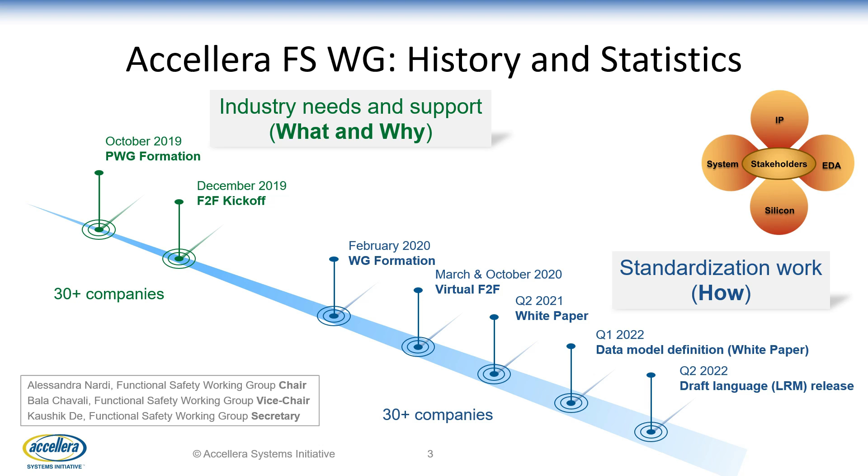Just a quick reminder before we jump into the meat of the workshop: please keep in mind that everything you see in this presentation is work in progress. It's the standardization working group, so as you can imagine, there are tons of discussions ongoing, and until something is published, things can change. Keep that in mind, and please enjoy the rest of the presentation.

With the increasing demand of compute power, the electronic systems deployed in safety critical applications become more and more complex. As a result, the safety requirements also become more complex, and it affects all parts of the system, including hardware and software. Addressing these safety requirements results in various safety activities and operations. These are documented in ISO standard and are referred to as work products.

However, the standard does not strictly specify how this safety data is stored, exchanged, and integrated among different entities. Additionally, the format and language of this work product is also not standardized. This poses many challenges to the creation, manipulation, and exchange of data. The Accellera working group has identified 5 major categories of these challenges.

These include exchange of the same safety information across different automation tools, connection of safety data with design information, sharing of safety data across different operations and work products in the same layer, and also across multiple layers between suppliers and integrators. The last one is traceability of information across the distributed development environment. These challenges are described in more detail in the next slide.

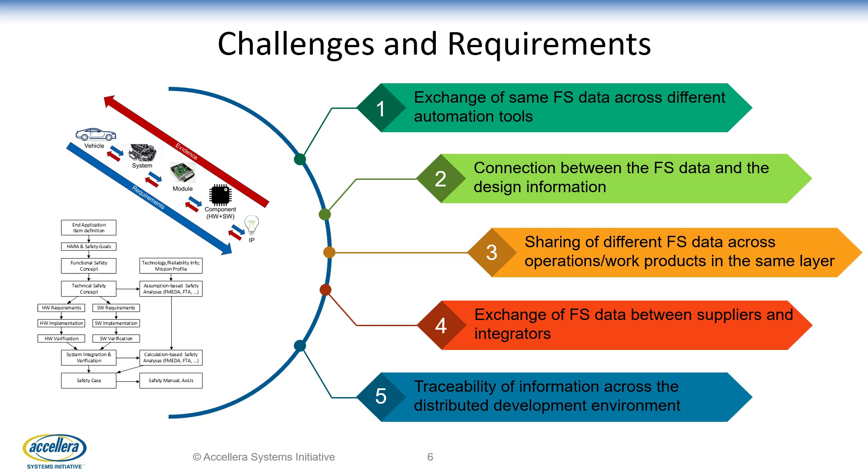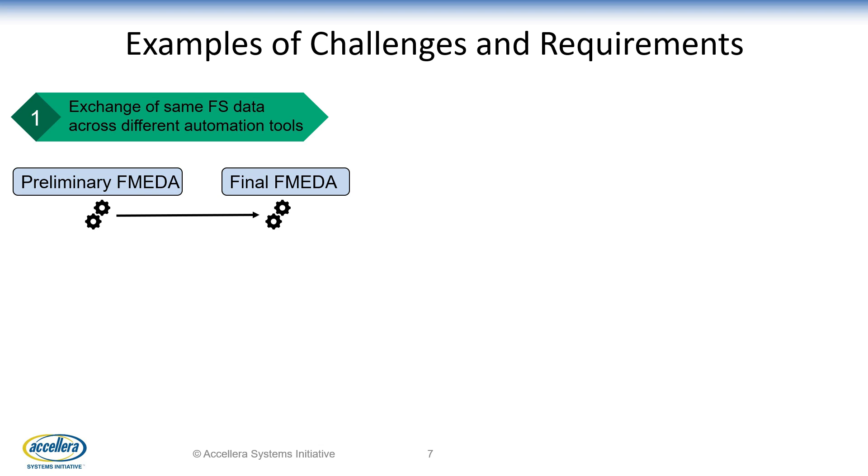In the last few years, there has been a lot of activity in development of automation tools for functional safety. However, these automation tools are developed in parallel, and they don't support a common language or format. For example, an FMEDA created by a supplier using one tool cannot be directly used by the integrator using another tool. Another example is when a preliminary FMEDA needs to be leveraged into a final FMEDA.

The second challenge is the connection between the functional safety data and design information. When doing safety analysis, some information that is needed comes from the design metrics. For example, when performing final FMEDA and calculating failure rates for a failure mode, design information such as the area of the design, transistor count, or design hierarchy is needed. This is currently a manual process, or a custom solution is developed.

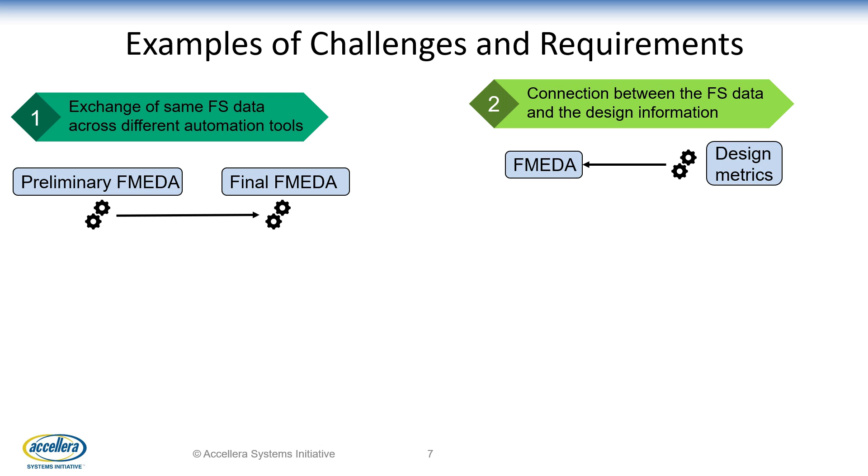The third challenge is sharing functional safety data across different work products in the same layer. There might be several different safety related activities or operations performed within the same layer, and these different operations require data that is dependent on each other.

For example, when FMEDA is performed, the safety mechanisms and the failure mode information is contained in the FMEDA report. This information now needs to flow to the design, implementation, and verification plan. Also, the verification metrics need to be back annotated to the FMEDA report.

The fourth challenge is the exchange of functional safety data between different suppliers and integrators. For example, one integrator might be getting FMEDA reports from two different suppliers, and these two FMEDA reports might be in completely different formats. So now the challenge is on the integrator side to merge these two FMEDA reports and create a system level FMEDA report. A second example is when one particular supplier needs to provide FMEDA to two different integrators.

In this case, the requirement might be different from the two different integrators. As a result, the supplier will need to create two different FMEDA reports for the same design in order to satisfy the integrator's requirements. The last challenge is traceability.

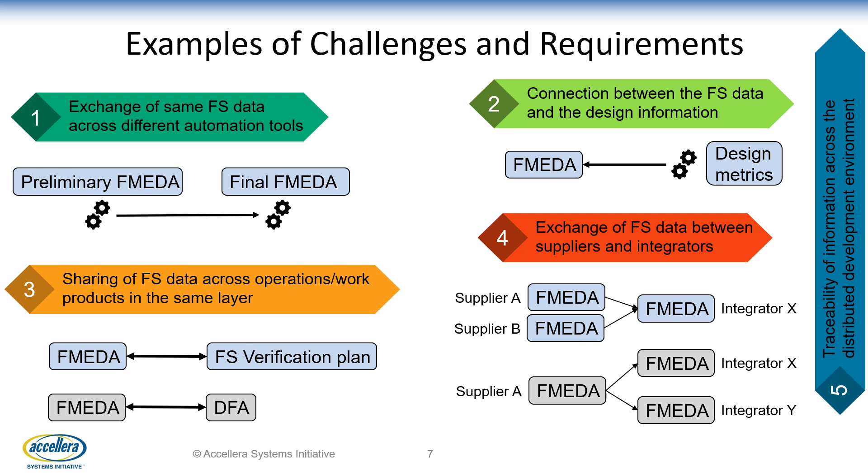The challenges outlined earlier require improvement in three different characteristics of the development process. First is interoperability, which means the ability to accurately provide and integrate data across the supply chain. Second is traceability, which is the ability to bidirectionally trace and verify the history and connection of the information. And the last one is automation, which is the use of EDA tools to automate tasks of manipulating, storing, and exchanging information.

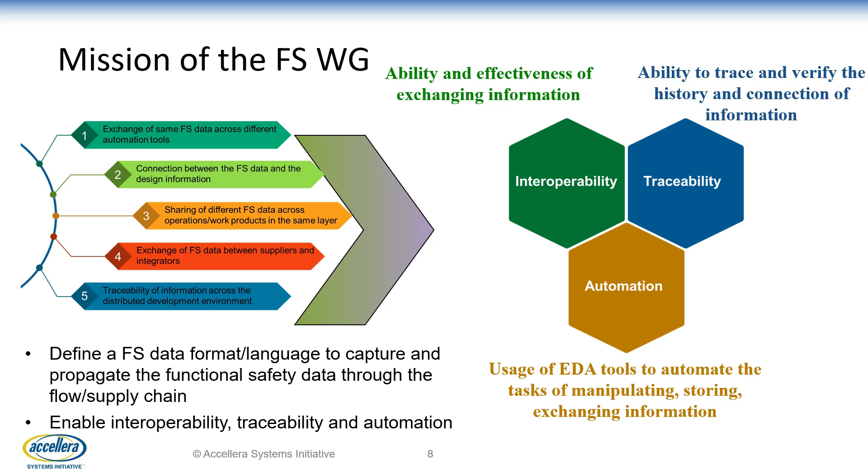The immediate mission of the Accellera working group is to provide a unified definition of functional safety data, format, and language to propagate data across the distributed development environment. Eventually, this enables the interoperability, traceability, and automation of data. To support safety critical applications, information needs to be passed or exchanged along two different directions.

Interlayer is the communication between, say, IP to a component, or a component to a module. For example, safety requirements might flow from the upper layer to the lower layer. On the other hand, multiple safety activities might need to be performed in the same layer. For example, safety requirements might flow from the safety documentation to the design and to the verification in the same layer.

As the safety life cycle proceeds, work products such as safety requirements, FMEDA reports, DFA reports, and FTA reports might be generated. It is therefore valuable to establish standard definitions of the data elements contained within these work products.

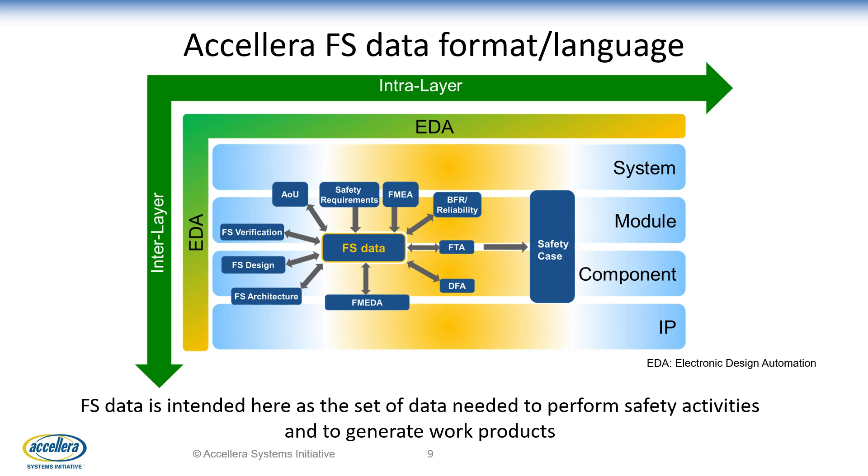Several standards exist today for the functional safety development lifecycle. While IEC 61508 is applicable to several industries, there are also industry-specific standards derived from 61508. For example, ISO 26262 is specific to the automotive industry. These standards provide best practices and guidelines that need to be followed in order to achieve adequate risk reduction.

The Accellera working group does not intend to define new practices. However, the focus is on developing the functional safety data format and language that supports these guidelines. This data format and language will be consistent with existing standards, and focus will be on their enablement by improving automation, interoperability, and traceability.

IEEE has also formed the P2851 working group, which is complementary to the work being performed by Accellera. As in other successful standard definitions, once completed and published, the Accellera standard will be considered for contribution to the IEEE standard.

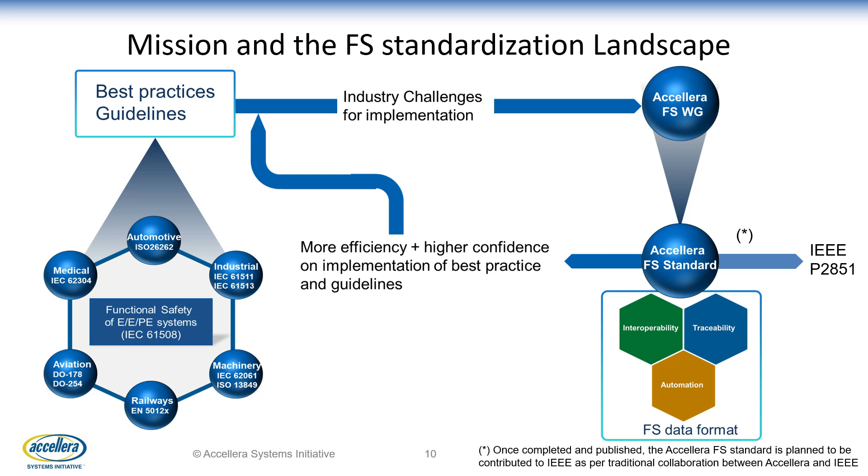The scope of the working group transcends across several dimensions, shown in this slide. The green boxes define the scope of the working group and capture how the work will proceed in phases. The initial focus aligns with the content below the green dotted line, while the content above the dotted line will be future work. While the immediate focus is around the automotive industry, the work of the working group is planned to proceed incrementally and expand into industrial, aerospace, and medical industries.

Similarly, the work started on the digital domain will later extend into mixed signal, analog, and other domains. And lastly, the immediate focus right now is on the FMEDA work product, but the work will again incrementally extend into other work products.

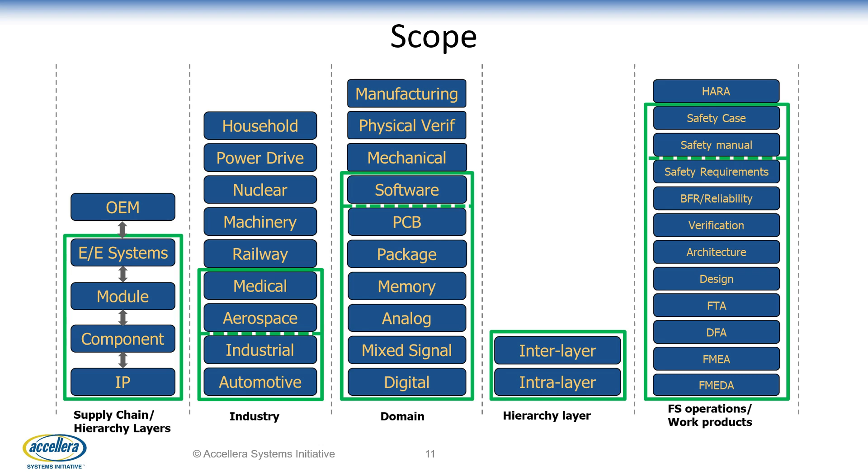The functional safety standard will include the safety content information in addition to and separately from the design information. In context of enabling tool automation, the safety standard will add to the design information data to traverse and support the entire development lifecycle. The safety standard will enable the functional safety aware design and verification flow by defining the data model to capture and propagate the safety content across the different safety activities in the same layer and also between layers ranging from system to the IP.

In summary, the key objective of the standardization process is to harmonize the best practices and terminology across the industry by a common language and schema. Also, to enable efficient interchange of data representing the functional safety concepts across the safety lifecycle and also among different organizations. And lastly, to be comprehensive, flexible, and scalable to meet future needs.

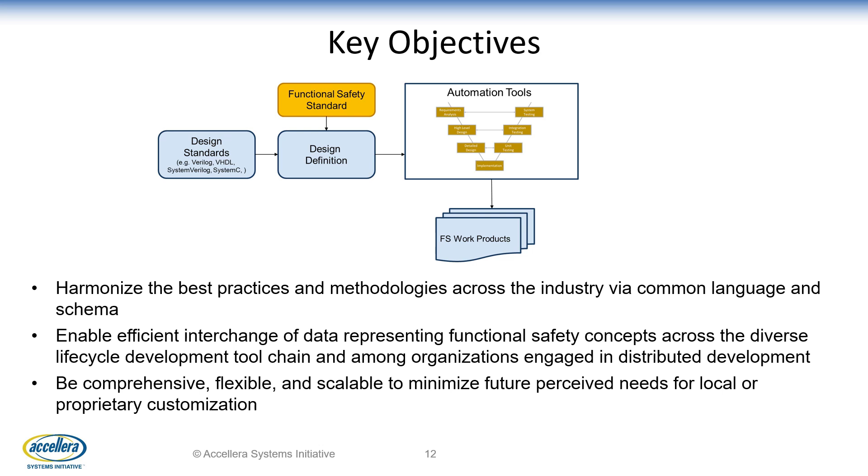Now, I will hand over to my colleague Jake to describe the data model in more detail.

Thanks, Aaron, for an overview of the challenges, mission, scope, and objectives of the working group. As mentioned previously, my name is Jacob Wiltgen, and I'm the Functional Safety Solutions Manager for Siemens EDA Design and Verification Division. I'll be talking about the process formalization and the creation of the data model supporting the functional safety content that this working group is focused on.

First, let's take a look at the scope of the functional safety data that the group is looking at. Safety-critical standards require a wide range of work products, and the data populated in those work products is a result of expert-driven analysis and/or tools delivering this data. This includes data from safety activities and verification, analysis, requirements definition, and more.

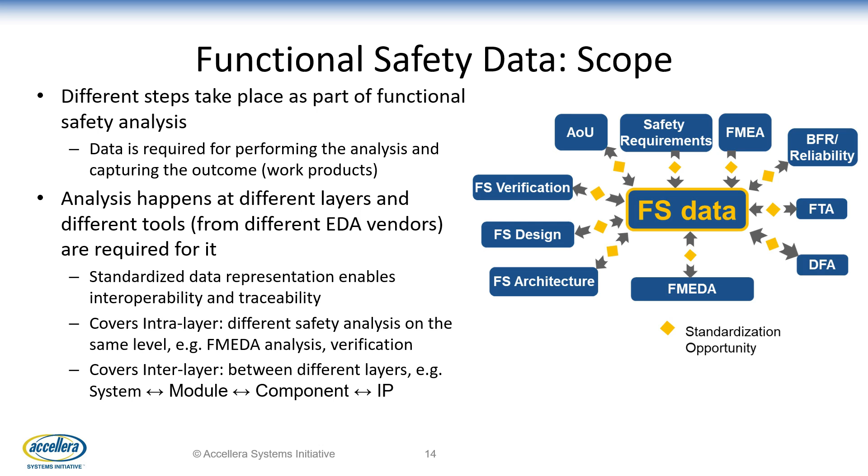The primary goal of the data model effort is to form bridges between the various functional safety work products and the tools generating the functional safety data for those work products. It is important to note that this standard effort isn't focused on standardizing on a particular type of functional safety analysis, such as standardizing on the creation of an FMEDA, as much of this is already covered in existing functional safety standards. Our goal is to create a data model of safety data supporting the multiple methodologies which exist and are in use in the industry today, and ultimately enable the realization of requirements articulated in those existing standards.

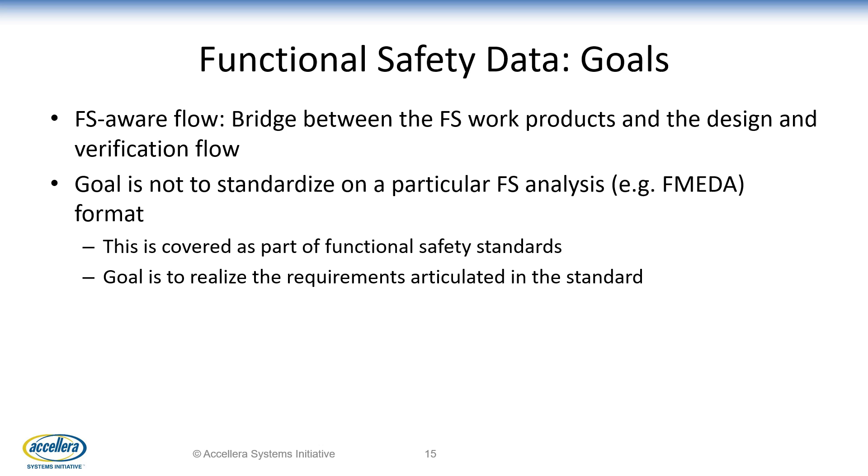A layered approach has been adopted for the development of the functional safety content, where the focus is to identify and agree on the content first, followed by the development of a conceptual data model. The conceptual data model then drives the language and format of the functional safety data.

Similarly, scope is layered based on dimensions, namely work product and activities, industry segments governed by the relevant safety standards, and domains like digital and analog hardware and others.

To help scope the data model efforts into bite-sized chunks, the group plans to collate and agree on the functional safety content for FMEDA from an automotive functional safety standard for digital components first.

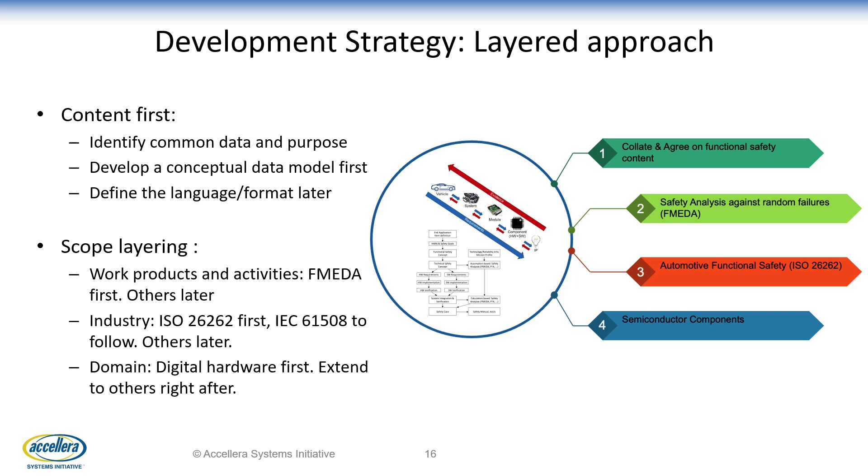The task related to FMEDA data model has been layered into 3 steps. The first step is to arrive at a consensus on a generic approach which serves the current practices and is flexible enough to serve the currently unforeseen methods in the future as the product development methodologies and technologies evolve.

Formalization of the functional safety analysis process is the first step, which leads to the development of the conceptual data model. And then finally, the activity shall culminate into a data model language, which will enable interoperability, or the ability and effectiveness of exchanging information.

As an example, this is the exchange of functional safety content across different automation tools and the sharing of different functional safety content across different operations and work products within the same lifecycle.

Second is traceability, which is the ability to trace and verify the history and connection of the information by means of recorded identification.

And the third element which is enabled is automation, which is the usage of EDA tools to automate the tasks of manipulating, storing, and exchanging information. And although automation will enable improvement in all of the challenges described previously, the most visible need is the connection between the functional safety content and the design.

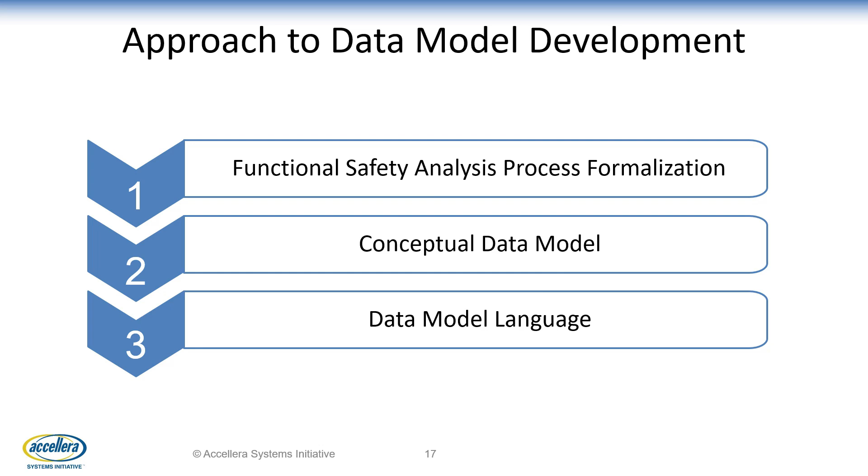Defining the basic concepts around FMEDA has been at the core of the activities in the last couple of months in the working group. The first focus area is FMEDA types, of which 2 have been defined.

The first is assumption-based, which is an FMEDA derived from pure expert or engineering judgment, and the second is a calculation-based FMEDA derived from safety analysis verification using techniques like fault injection and formal analysis and others.

Secondly is the mapping between hierarchies. This includes the mapping between the functional safety hierarchy and the design, as well as the mapping between safety mechanisms and the design, as two examples.

Third is the representation and connection of functional safety information, including the connection between different design abstraction levels of the safety analysis, both inter and intra-layer, as well as across different activities in the life cycle, such as FMEDA, FTA, DFA, and more. Also in focus is the functional safety model elements and associated attributes, as well as safety mechanism and diagnostic coverage representation and aggregation for safety mechanism configurability.

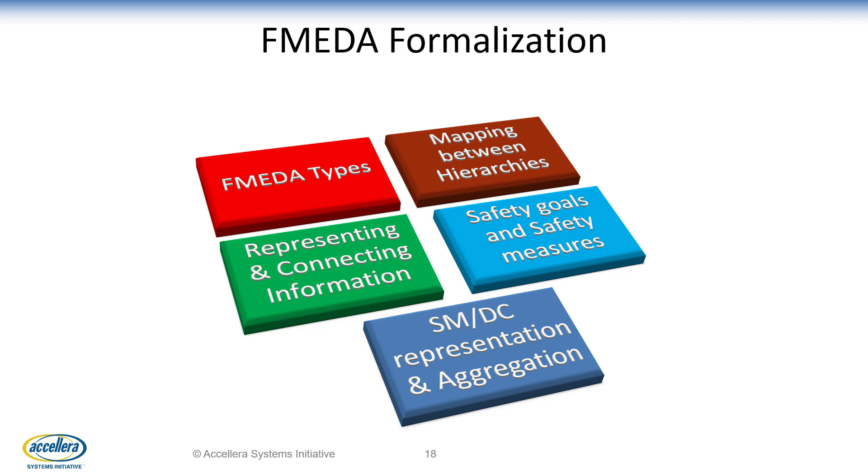For clarity in the context of the data model definition, there are two types of FMEDA we have previously discussed. The first is assumption-based FMEDA, where design metrics are estimated by the user, also commonly referred to as expert-driven judgment or expert-driven population of FMEDA data. The second is calculation-based FMEDA, where design metrics are derived from the design hierarchy and related data on area. Calculation-based FMEDA is performed after design mapping. But it's important to note that the final FMEDA can be a combination of both.

The rationale for this distinction is that when the functional safety hierarchy and the failure mode hierarchy are linked to the design hierarchy, as is the case with calculation-based FMEDA, the safety metrics are not assigned by the user but are derived from the design hierarchy. It's important to note that this distinction does not imply a greater level of accuracy.

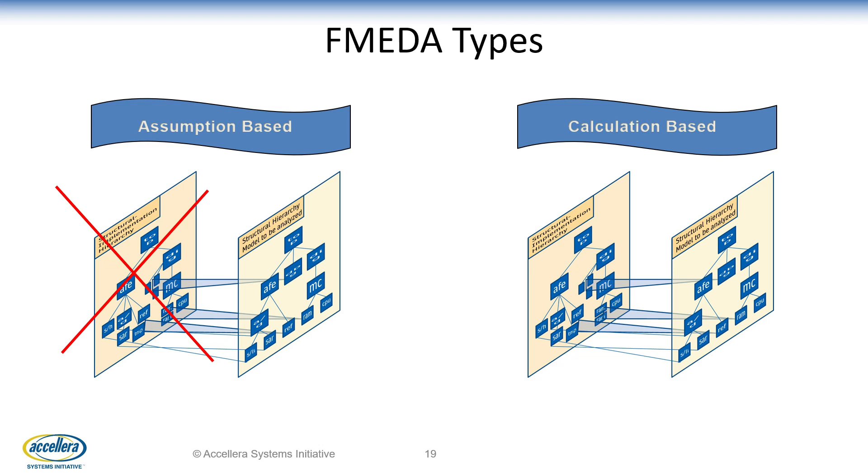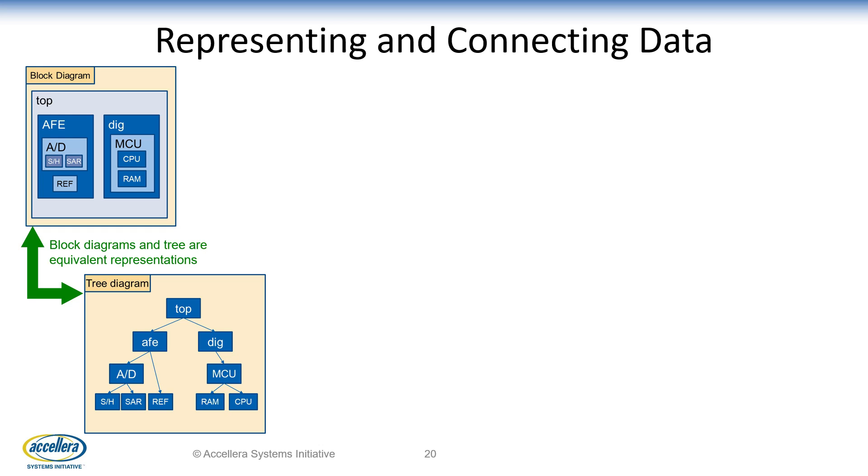A design may be represented in different but equivalent ways, like block diagrams and trees, as shown on the left. From the design hierarchy, the safety analysis hierarchy is formed. And for a calculation-based FMEDA, the analysis hierarchy is then mapped to the design hierarchy, connecting the chain between the design hierarchy and the safety analysis hierarchy.

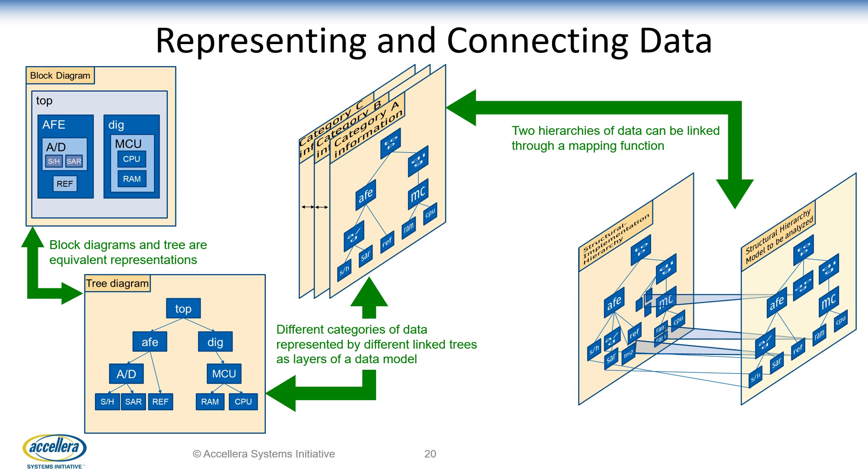Looking at this from a flow perspective, on the left we have the structural view of the design, which can either be a tree representation or a block diagram representation, and either structural or functional. Moving to step 2, the functional safety analysis is formed based on the intended functionality of the design from the safety requirements point of view.

It selects the design depth for safety analysis and assigns the safety relevance. Then, on the far right, each leaf of the functional safety analysis hierarchy can fail, and therefore failure modes are assigned to those leaves, forming the failure mode hierarchy.

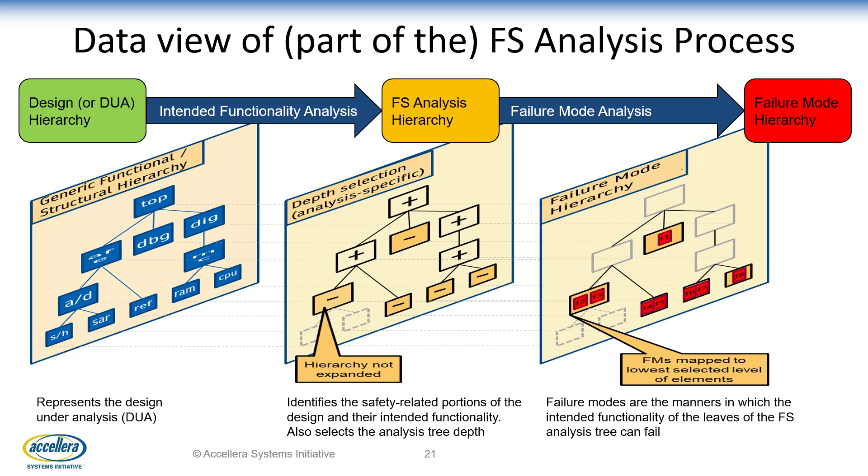With some of the basic concepts covered, let's take a peek at the functional safety data model and the categories defined. At this point in time, data model support for FMEDA for an automotive ISO 26262 IC must contain information defining the functional safety analysis hierarchy, failure mode hierarchy, technology and reliability information, safety goals and requirements, safety measures, also commonly known as safety mechanisms, and the necessary mapping between safety measures, the safety analysis hierarchy, the failure mode hierarchy, and more.

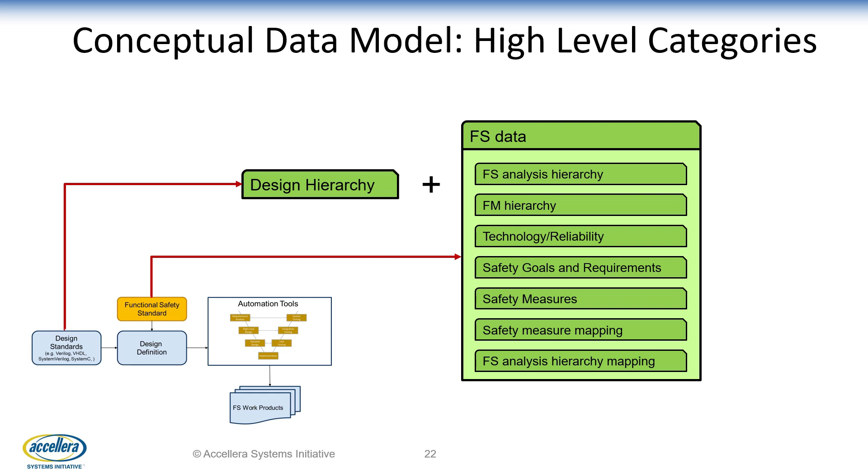Diving one level deeper, this is a quick look at the data model entry for a safety mechanism. Certainly too much to go through in this presentation, but as you can see, we have defined a set of attributes applicable to a safety mechanism entry, such as name, diagnostic coverage for permanent and transient failures, the configurability of the safety feature, and more. We also define the type designation for those attributes, whether the attributes are required, and a description to help facilitate understanding of the usage of each attribute.

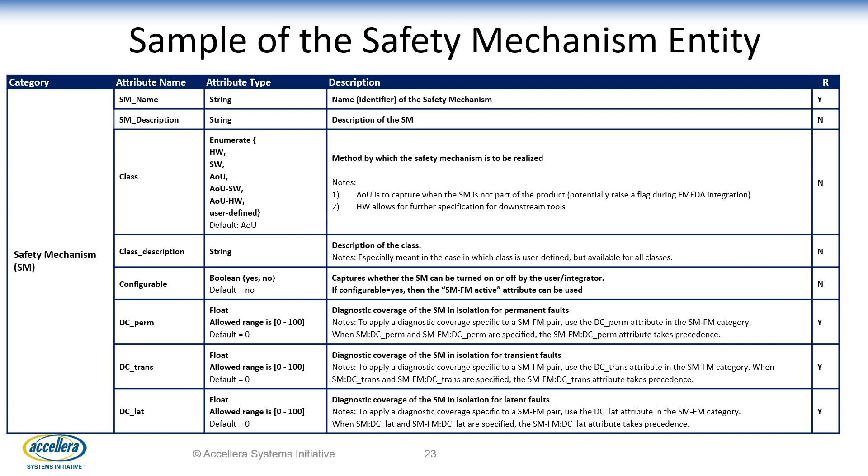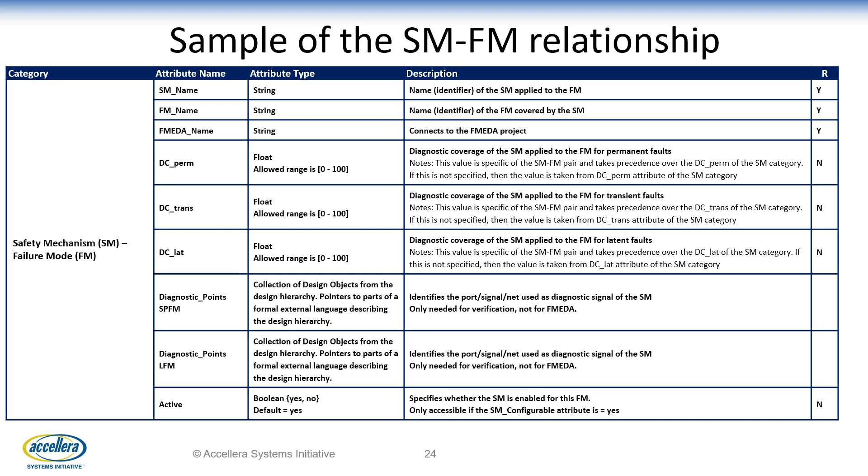So hopefully this has provided a glimpse into some of the data model work completed and currently ongoing within the Functional Safety Working Group. To talk about some of the future work, I'm passing the ball off to my colleague Regis.

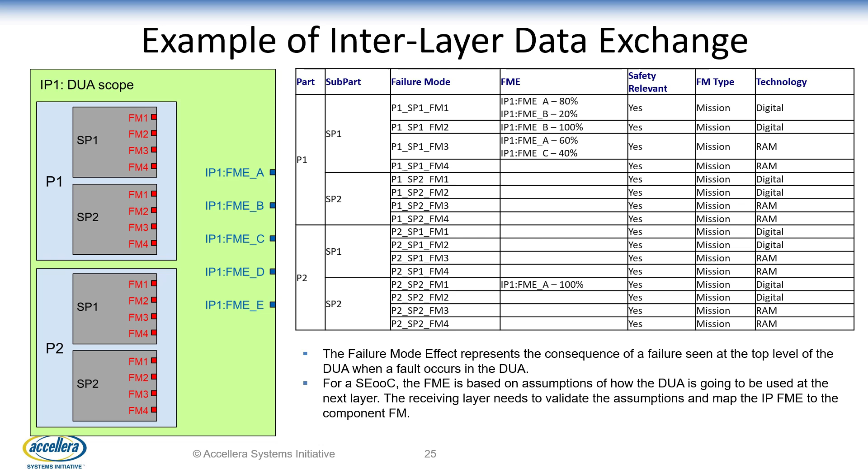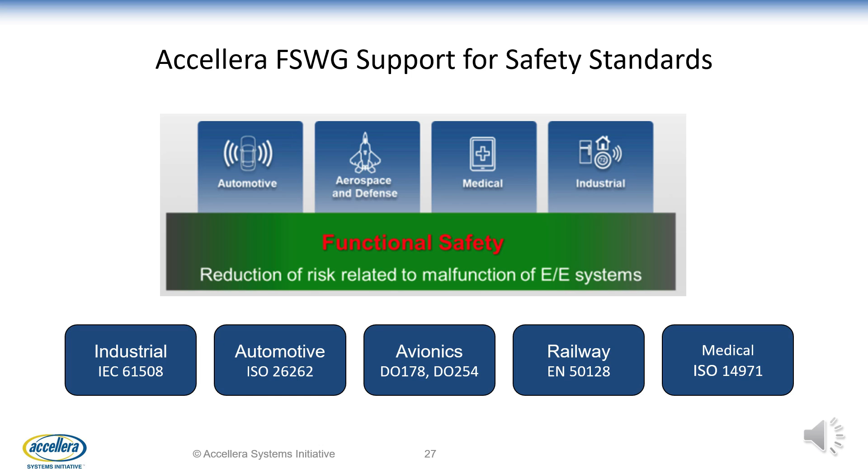As previously said, Accellera has started the work focusing on the safety analysis. But of course, functional safety needs to address various topics. The goal is to have the data model covering most of the key data manipulated and communicated during the development. This data is part of safety analysis, but not only. It's also part of plenty of the other activities during the development, such as requirements, verification, validation, etc.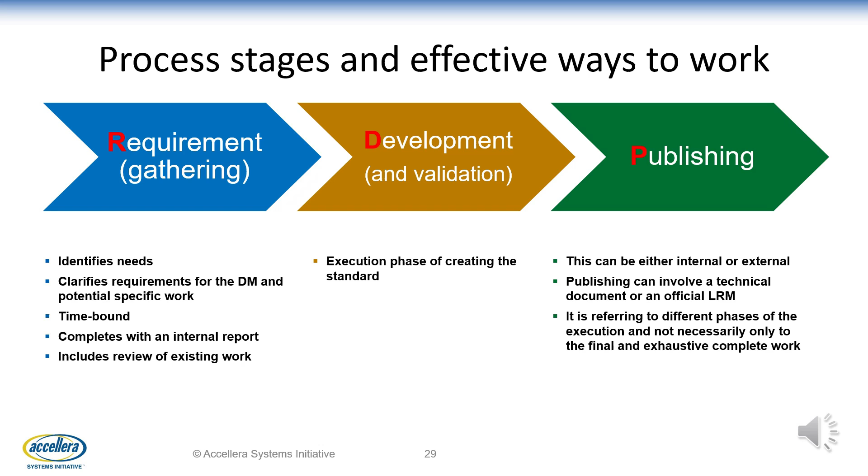For example, the safety analysis is always made with a lot of assumptions. You can have as an assumption the failure rate, failure mode distributions, the architecture allocation, etc. The phase of the safety verification confirms or disconfirms the assumption and adjusts the metrics elaborated by the safety analysis. The functional safety group will identify what is the key set of data used by the different existing safety verification and validation methods in order to consider this set of data in the data model for the Accellera standard.

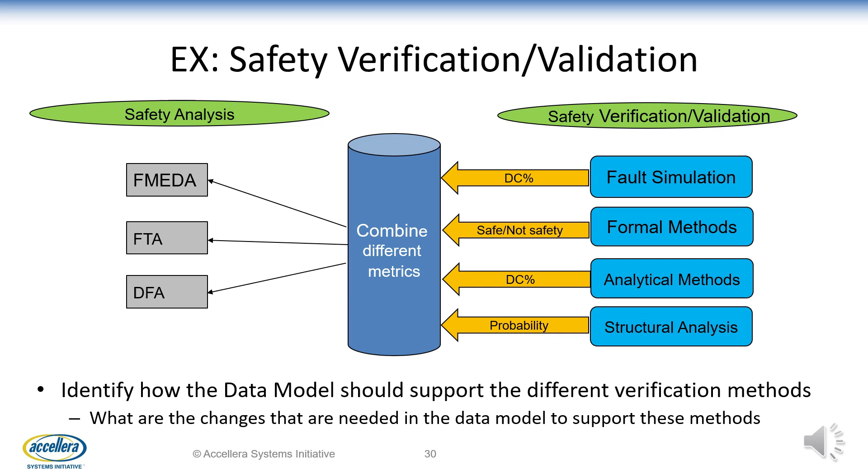So as previously explained, there are different angles that need to be covered in the Accellera standard. The diversity of the functional safety standards and the different activities and topics make the interoperability complex. One of the main goals is to be exhaustive in the scope and make sure that we satisfy every domain of application and activities.

The complexity implies very detailed technical discussion, sharing use cases based on the experience of the experts participating in the group. We make sure to identify in a systematic way all the interaction between the activities during the development. This work leads into the improvement of the data model itself, the definition of interfaces, and additional needs, for example, methods, constraints, etc.